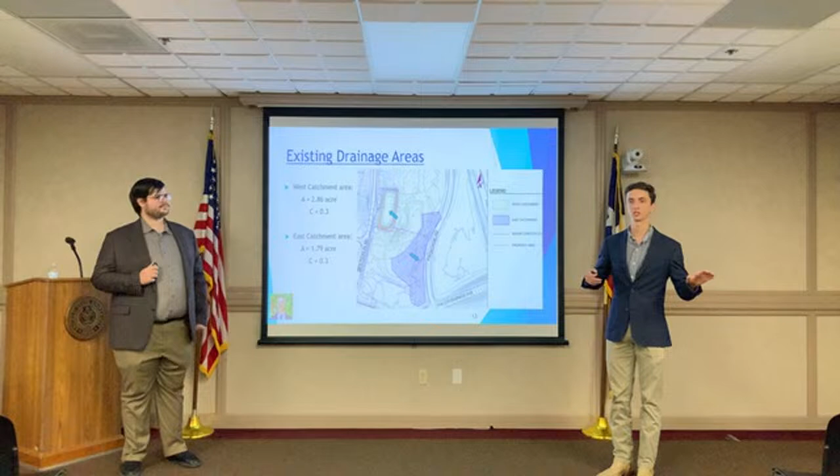1.79 acres. Now, when considering our design options, we thought about two. The first being to keep the same drainage pattern that's existing—having a high point where our building would be located, draining a portion to the retention pond and a roughly even portion to Frontage Road. The second design option, and more on that in a moment, would be to grade the site in a way that we get as much area of the site draining to the existing retention pond.

The reason both catchments have a time of concentration of 10 minutes is that, per the Storm Water Design Manual, if you calculate a time of concentration below 5 or 10 minutes, you are to round it up to 10 minutes for any other peak flow calculations. That is why we have those there.

The west catchment includes the existing retention pond and has a peak flow of about 7.05 cubic feet per second. The east catchment, which includes a drainage ditch running along Frontage Road, has a peak flow of about 4.41 cubic feet per second.

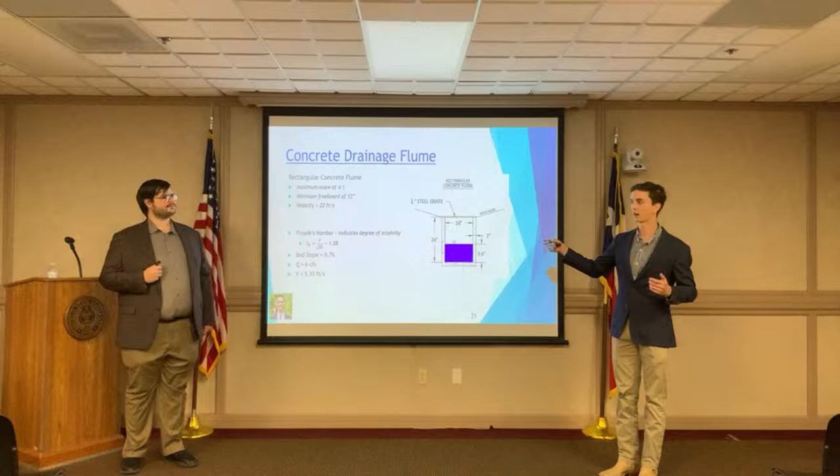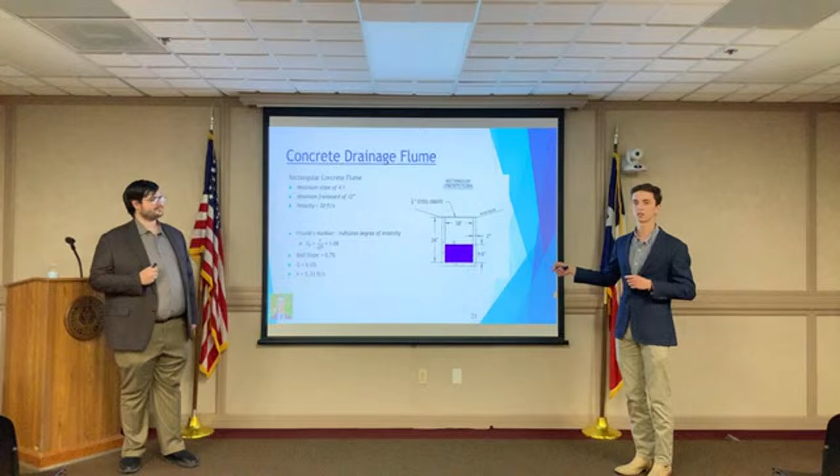We have a requirement of a maximum of 25%, or 4-to-1, and we need a minimum freeboard of 12 inches. For our open channel flume, this means from the top of the flume downward, that 12 inches needs to have no water flow in it. We also need to not exceed a velocity of 20 feet per second. So designing a 1.5 foot wide concrete flume, we found it can have 9.6 inches of water flow.

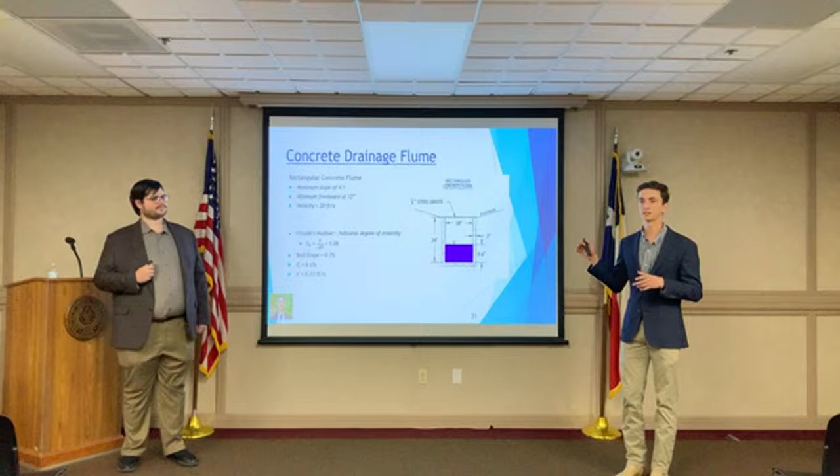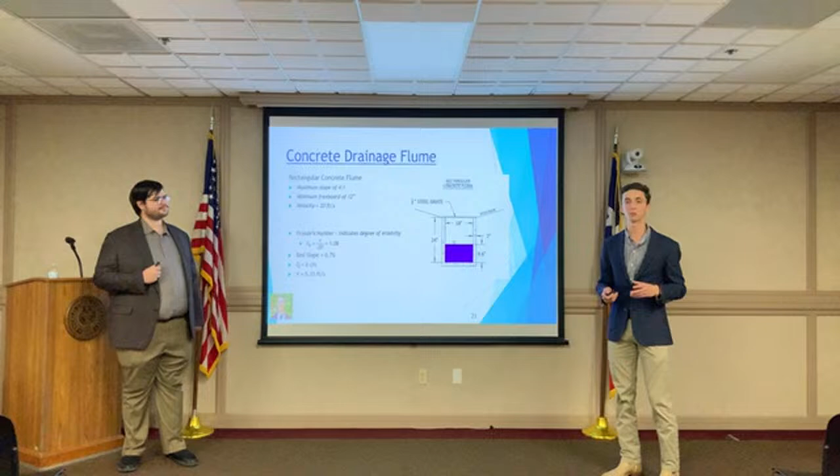This gives us our 12 inches of freeboard and allows us to match existing grade with a 4-to-1, or 25%, slope. We also considered not having a lined open channel—no flume or concrete there. However, another reason we thought this would be the best design is our Froude number. Anything greater than 1 indicates a likelihood of erosion, so in open channel flow we need to ensure we're not eroding the area. Think about it: if we're on the north end of the building and eroding the area all the time, we're going to undercut the building. We found a Froude number of 1.08, slightly greater than 1, so it's not too much concern, but just to be safe we decided to line this open channel flume in concrete with this rectangular design.

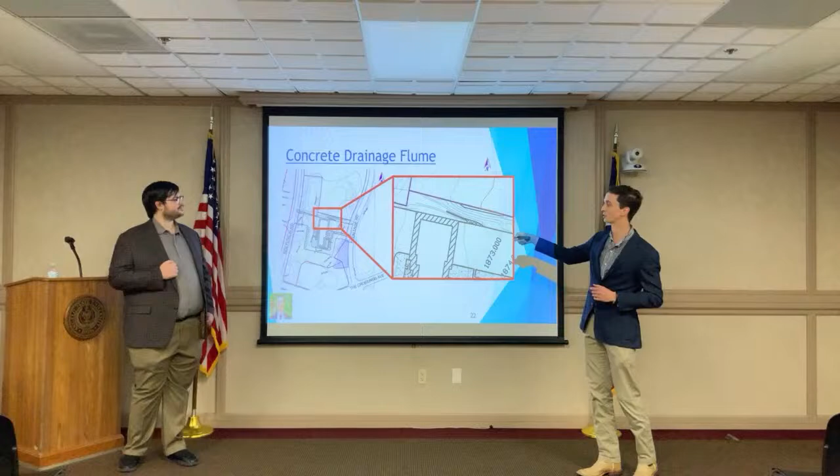Here's a zoomed in portion so we're clear. As you can see, our entire site—this north end, here's the berm, and our building, berm, and building—they slope down to this open channel flow. There'll be a steel grate over the top of this so someone doesn't stick a limb in and break it or something.

Moving on now, design for our drainage: we found that for the west end, thanks to the existing retention pond, we were able to meet the stormwater design manual standards, since we got our 13.9 cubic feet per second flow to match the 7.05 cubic feet per second flow, reducing it to 6.8 cubic feet per second. We were able to get the existing and proposed runoff flows relatively close to each other—not exactly the same, but just 1, maybe 2 cubic feet per second difference.

Now, another thing to mention is that in a residential area further to the west of our project area, they've mentioned they've had drainage problems, as most runoff goes through the area to get to Concho River.

They had some worrisome regards about our project. The retention pond itself is outside of our project area, which means we have no regulation or way of redesigning it, so we weren't able to really work with it.

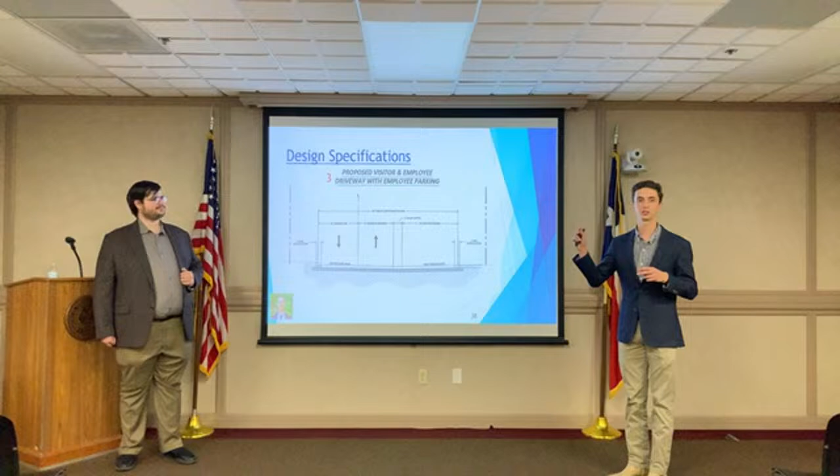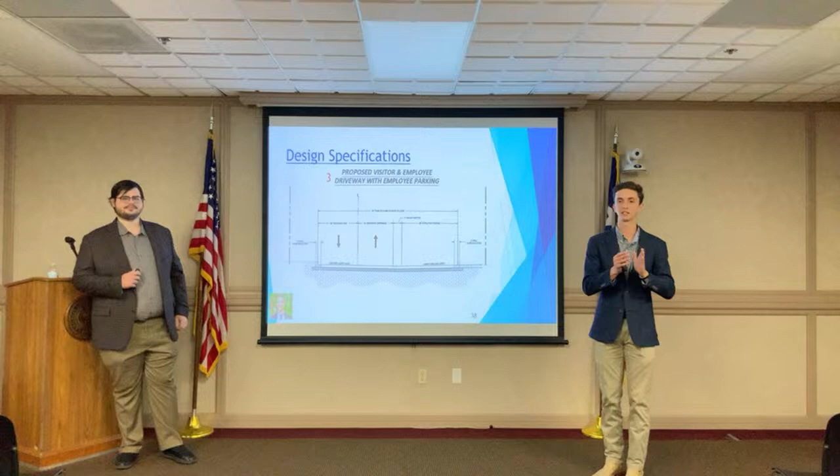Then we have our proposed 44-foot face-of-curb to face-of-curb. This consists of 2 travel lanes for the driveway and the 18-foot parking space. Between these two would be a valley gutter, so that water is not in the parking space, nor on the drive, but has a designated section to drain.

Here's a finalized overall view of our site layout with our 66-foot drives, our 24-foot drive, and our required parking.

Now for the environmental section with Will.

Going into our environmental scope, we are to provide to our client the impacts of the environment that our project will have, as well as any required documents, primarily from TCEQ, the Texas Commission on Environmental Quality, and an erosion control plan for the project itself.

For the design standards, we once again go from our design manual from the city of San Angelo. We primarily looked at water runoff erosion control, such as flow not exceeding 12 feet per second to reduce erosion from our site. We are also going to use a silt fence design standard from the city of San Angelo, which we'll talk about in a bit. For the TCEQ, we looked over the Stormwater Pollution Prevention Plan.

The Stormwater Pollution Prevention Plan is a document that has the environmental engineer go over any pollutants caused at the site itself, explaining how those pollutants will be regulated, removed, or completely eliminated from the site, and every type of erosion control plan that will be implemented at the site.

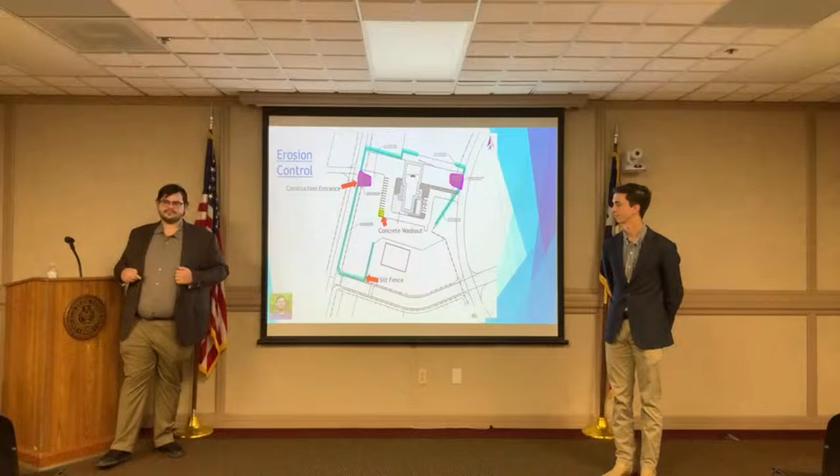Moving to the construction portion of our project, we are meant to provide to our client the project timeline as well as an opinion of probable cost for the project. For the timeline, we go through the pre-construction, construction, and post-construction process.

For pre-construction, for the entire project, we believe it will take about 2 years. Though we are only focusing on drainage and the transportation—aka the parking layout—and not the building, we still implement the time it will take to build the fire station within our timeline, so we can take an outward look at, say, this date we'll start doing concrete after the building has been built. For pre-construction itself, we give it about a month.

This is mostly to set up meeting times with the contractor and the client, as well as getting all the material positioned, doing some mobilization, and setting up environmental erosion control.

For construction, we believe this will take about 22 months, the primary amount of which is mostly excavating as well as the building itself, with the building taking about 18 months, which includes foundations, utilities, and the full upward build of the site.

We believe that for concrete placement, it's going to take about 3 months for the entire site, as we have a lot of concrete that needs to be placed. This also includes the fact that it takes about a week or so for the concrete to get where it's walkable, and even longer for trucks and other equipment to be driven on it.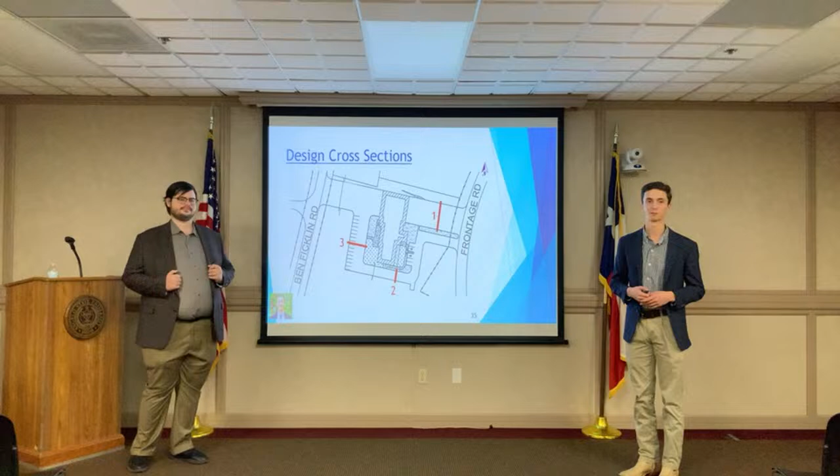And did you consider just a one-way flow of traffic, instead of a two-way flow for the employee and visitor? You didn't want them going back out through Ben Ficklin? Yeah, we didn't want them going out back through Ben Ficklin, because...

If you notice here, something that wasn't mentioned, this is a fence, so this can actually be closed. So the fire station should see no through traffic, and we wanted to ensure that traffic went down to Crossings Avenue, around, and did not cut through the station essentially.

All employees should stop here and not really cross this boundary, and all visitors really have no reason crossing this boundary.

Is there signage somewhere for, like, if a visitor was to pull in, to know that anything beyond that gate is employees only or something, to prevent them from continuing on around?

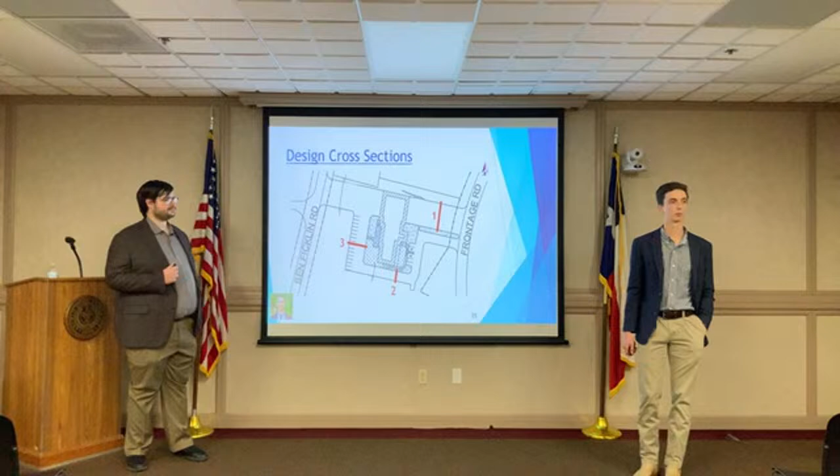I'm sure we would have a sign that says employees only beyond that point. So if a visitor was to show up and park, they would park in the visitor parking, and then just know they would exit out the same way that they came in. We do not currently show one, but there would be one, yes sir.

Did you do the signage plan? We did not, sir. It was not in our scope.

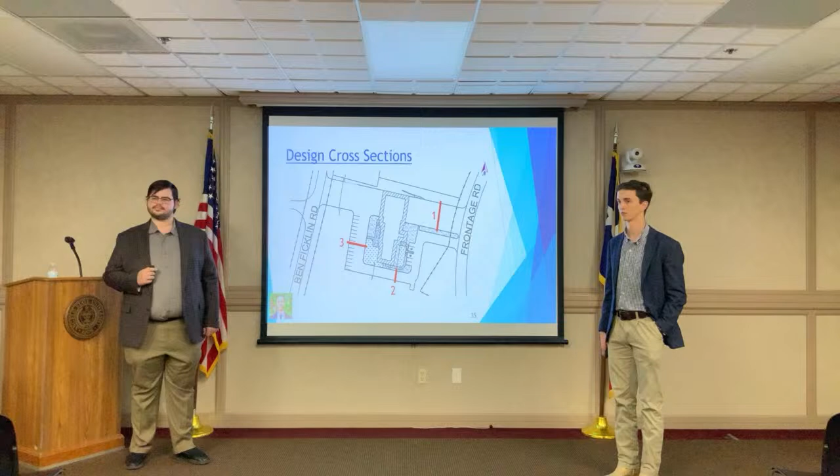That's fine. Question for Will, you have very good drainage calculations. One of the concerns was neighbors being concerned with the increase in flooding to the neighborhood on Pecan Road, I think was the name. Yes sir, Pecan Valley. Do you think, based on your calculations from the existing site and the pond, that their flooding issues are coming from this side or not?

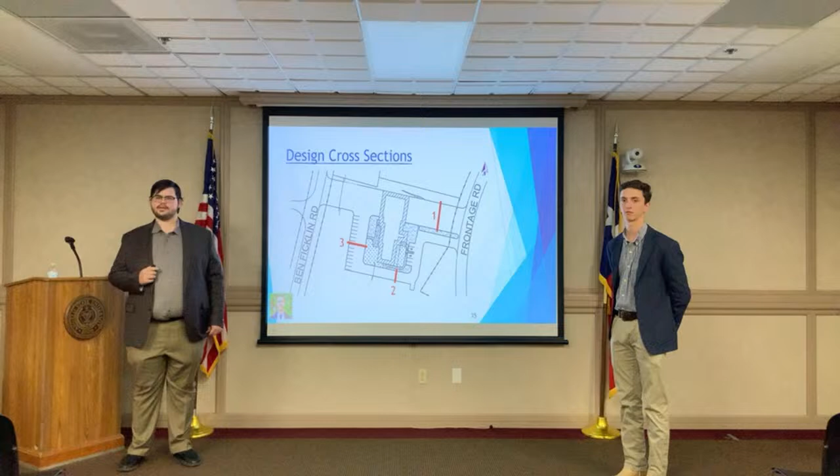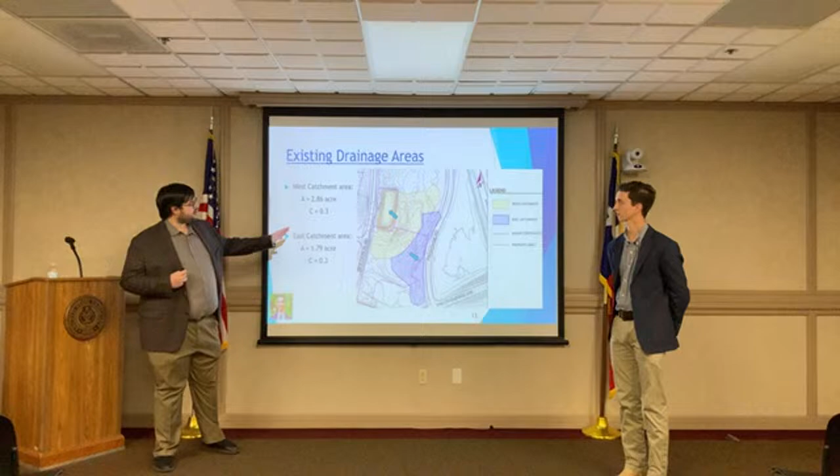From our design standards, from our catchment, I'll quickly jump through one of these. From our existing catchment, there were some worries with these existing retention ponds. As mentioned earlier, it is very much not from our design itself, but was designed by someone else. With how big the catchment area we predicted, we believe that retention pond itself is a lot bigger and holds a lot more water.

We haven't really done any design standards to figure out exactly how much water flows into Pecan Valley, but we don't believe the flow problem comes from just this retention area. We do believe that later on in the future of development, there may be a situation due to the culvert size and the amount of flow able to go through it, as the retention pond has a certain problem retaining water with its design structure. However, currently we don't believe it should primarily come from this site area for existing, and hopefully for our proposed design, it shouldn't cause any drainage problems from there.

Related to that, is it a retention pond or a detention pond? I always get them confused.

So the fun thing about our retention pond is that for a detention pond, normally the culvert would be placed at the bottom of the pond itself and would drain out all the water, meaning no water would be staying within the pond. But the pond itself would be able to hold a certain volume of water while it's being discharged to the culvert. Now this would somewhat seem like a detention pond, but actually, I don't know if you can really see it, within this pond it is actually a retention pond, because below the culvert there is a small swamp-like area right below it.

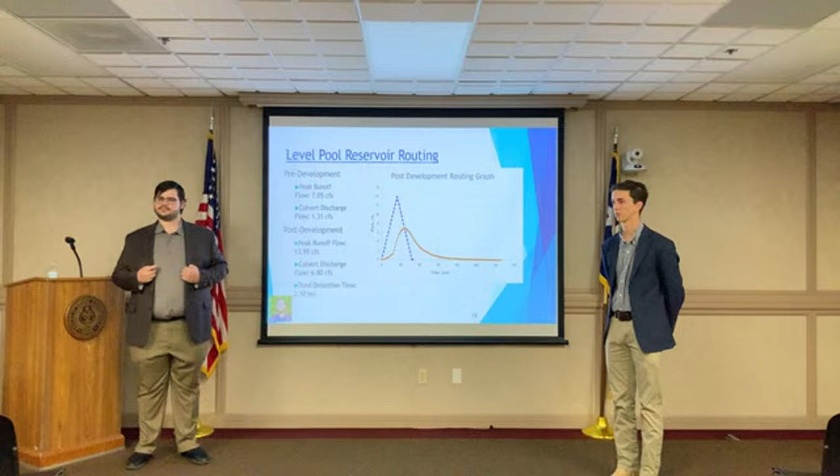So basically that's what's coming out of the site right now? Yes sir. So could that help you answer the question of neighbors, that the neighbors are not that concerned with our site? Yeah, currently our site doesn't discharge at a high enough volume. Will they be worried when it's at 6 point?

We believe there might be a little bit of worry. We don't believe the flow would be too much of a detriment, but obviously the numbers still go up, so there'll still be some worry like you mentioned. But it meets the standards. Yes sir. Good, the outflow of our site matches the existing outflow, the proposed outflow matches existing outflow, or similar.

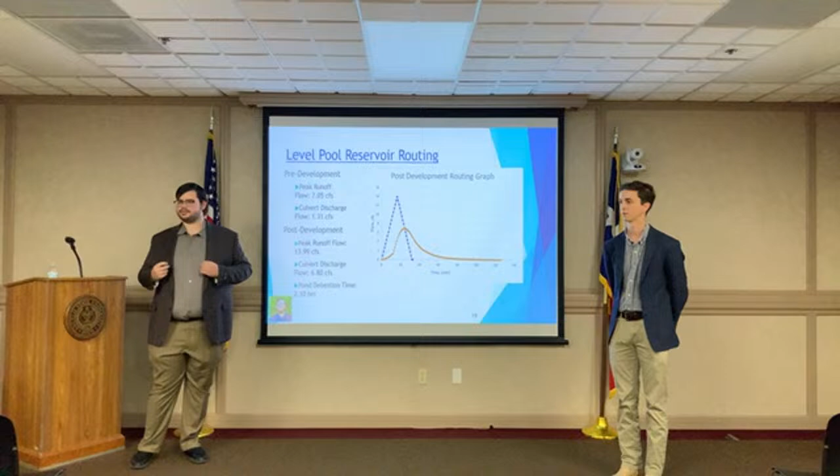Could you go back to your existing drainage area, Matt? Yes sir. Why didn't y'all take into account the south portion of the site as part of the existing drainage area? Because you have your areas basically just on the northeastern corner. So my question is, obviously that's part of your site in terms of permitting and what the city standards require. Why didn't y'all take that discharge off your site into account?

So, to be completely honest, that was an oversight at the beginning, unfortunately. However, thankfully, if you notice our proposed plan, we significantly decrease the area that would be heading southward to that. There's actually a culvert that runs and keeps going south along Ben Ficklin. And so, although it was an oversight at first, we significantly decreased the area going south, and so we would decrease stormwater runoff in that direction.

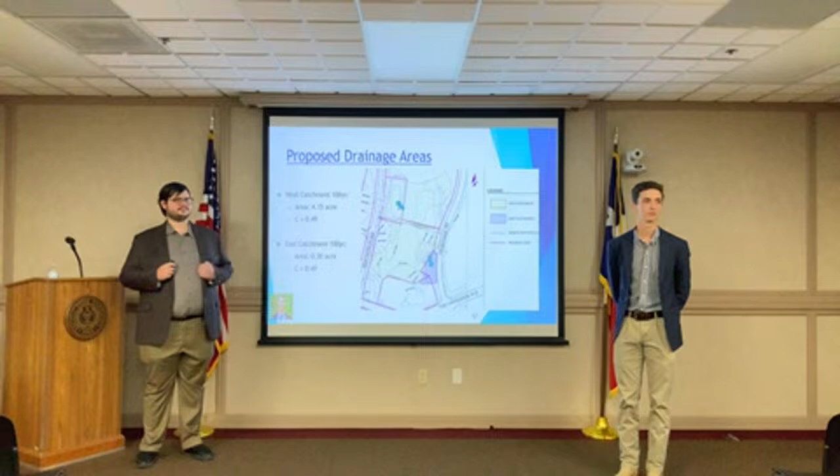Would that have increased your existing Q value if you incorporated that one in for your pre and post conditions, making sure they're equal? If you would have done that on the existing side?

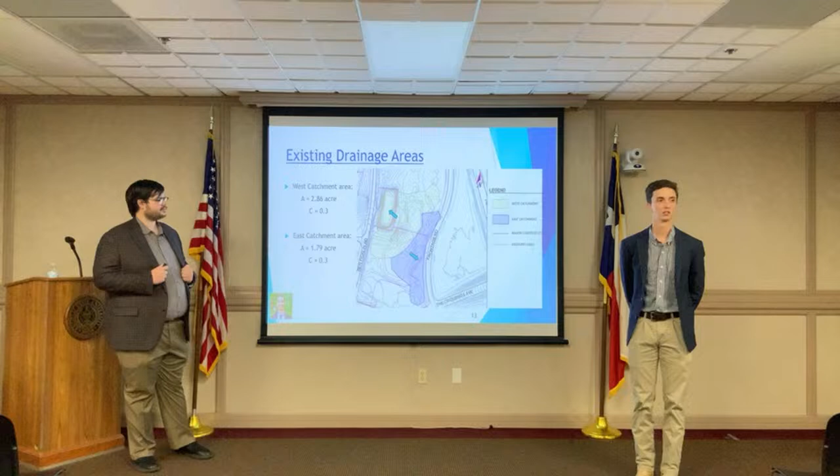I'm not exactly sure I understand your question. Essentially, if you just included that southern catchment in terms of your total runoff of your existing value and compared it to your post runoff value, would that have increased your existing, therefore making you increase your proposed to maintain, to mitigate the two and make sure you have that? Yes sir, yes sir.

Will, did you want to add something? No, I'm just making sure. Yeah, because the total flow, yes, it will increase, and it's just based on the mass balance equations. It would definitely increase the flow, but we believe that our proposed, as Josh just mentioned, our proposed flow rates would still come out with the calculations we have.

But just to clarify, Will, is that part of the catchment, or is that a separate catchment, the south one? What is happening there? What does that mean? Especially the white catchment, to the left. Right, like are you asking if it's part of our area?

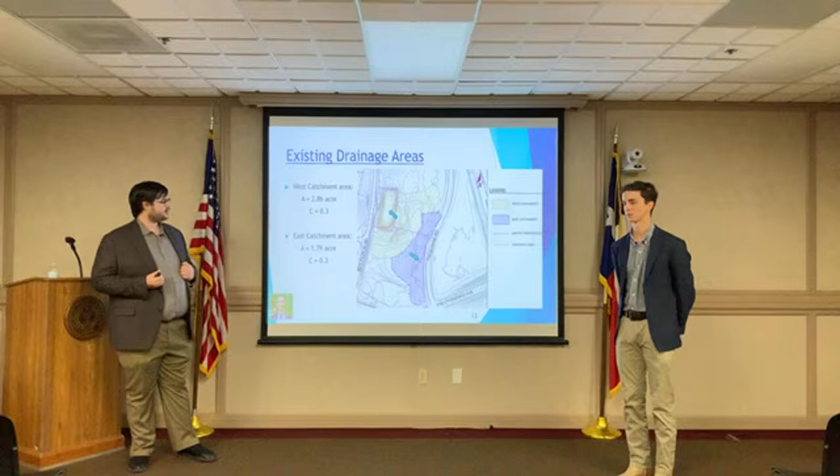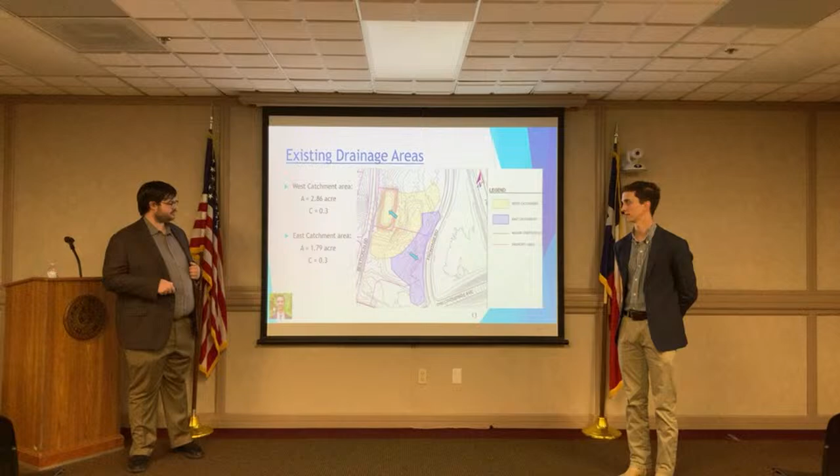It's part of your area, but is it part of the yellow catchment, purple catchment, or is it a different catchment? Oh no, this would have its own catchment. As mentioned earlier, we didn't look into it, but with our new catchment, it would reduce the area, as this area over here, which would normally flow down here, we take that up with our site. Thank you.

All right, I got two geotech questions for you. You said you believe the source of that high point in the center of the site was fill from a previous uncontrolled fill. There's no reason to think it was controlled, right? Did you estimate the depth of that, and does your grading plan get you below that to native soil? Do you know that, or if you don't, are you going to do over-excavation and recompaction, since you won't be able to put the building on uncontrolled fill? Did you look at that, have you been to the site, do you have a feeling for it?

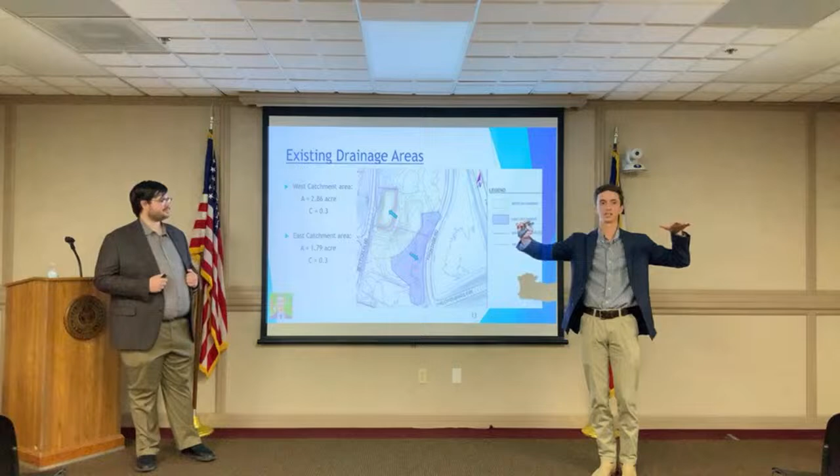We didn't spend too much time thinking about that. My only thoughts during grading were, if you think about it linearly, the existing elevation from the frontage road is about 1876.5, and the existing elevation on Ben Ficklin ranges from 1869 to 1871, so a decrease of about 5 feet. If we hypothetically say the natural ground, not including the uncontrolled fill, it would bring us probably near that, but we're not exactly sure.

How would you deal with that during construction? I'm just asking how you'd handle it as an engineer if you didn't know. I would handle it the same way you'd handle any borings. I'd take samples of surface conditions since we know that would be the uncontrolled fill, then as we take borings at certain depths we'd return soil logs and do a comparative analysis to see if it's matching. If it's matching, fine, if not, we probably hit what was there before.

I don't know if you discussed it, but did your grading plan get you down to where, presuming the building's on shallow foundations, there's going to be structural fill below the floor slab? Did your grading plan just take you down to where they'll put that fill, or did you include that structural fill in your grading plan?

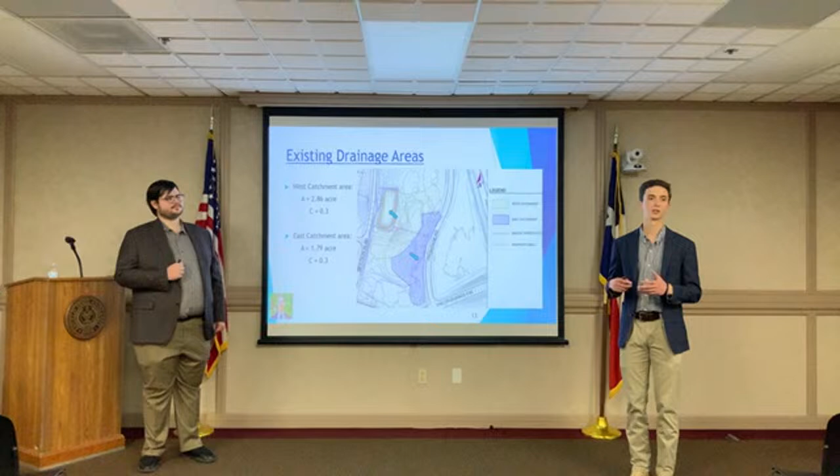Just for drainage purposes, the building's got to be higher than everything around it, right? Did you consider the need for structural fill, even if your shallow foundations sit on native material, you'll have to place fill directly below the slab, right? We determined, during grading, it was an iterative process trying to find what finished floor elevation worked with all our constraints. After we found that elevation, we said that's where the building slab will lie, and everything underneath is up to the geotechnical engineer.

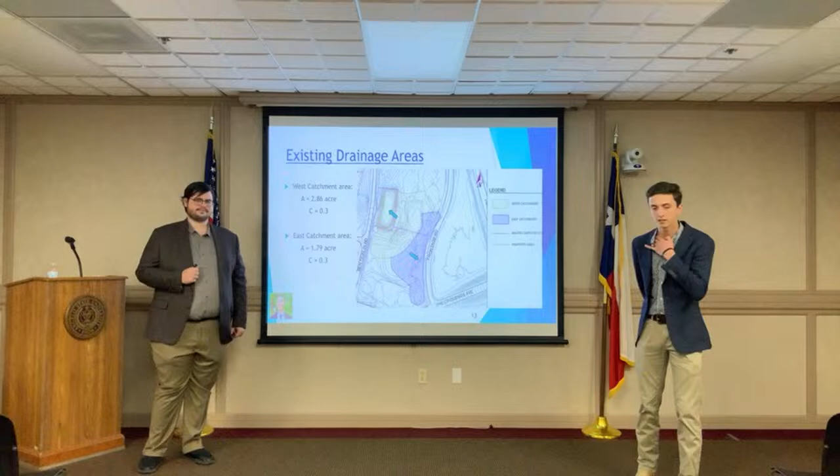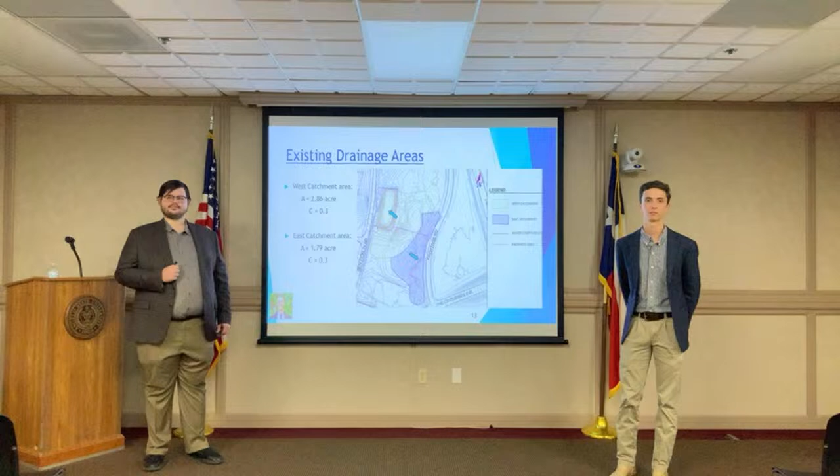So your grading plan takes you to just below the slab line? Say that again? So your grading plan assumes everything goes on, to put it simply, soil. You didn't grade below that to account for 6 inches of gravel or whatever subbase you need. No, we didn't. Other than elevation, the foundation design is probably under the structural/architectural scope, which is probably smart. I'm just trying to figure out where the grading plan went to.

Are you concerned about that for erosion or any other purposes, and do you need a retaining system there? Well, after adding the flume, if we're less than 25%, I'm not concerned about erosion.